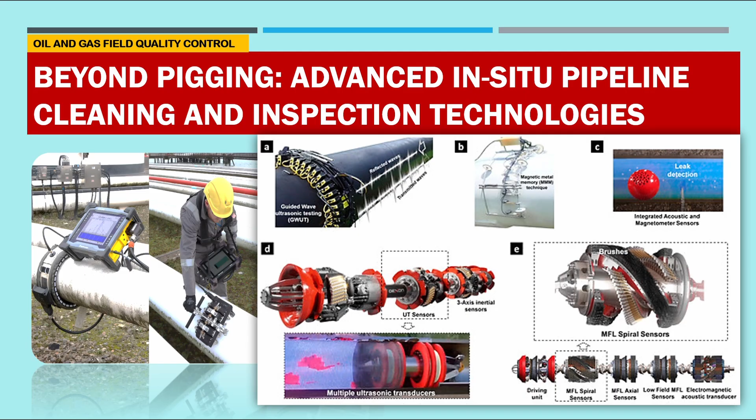The future of traditional pigging, the problem and solution with traditional pigging. Imagine your pipeline silently degrading, unseen threats lurking beneath the surface. Traditional pigging methods might miss critical anomalies, leading to catastrophic failures and costly downtime. But what if there was a way to guarantee pipeline integrity, detect problems before they become disasters, all without disrupting your operations? We are diving into revolutionary technologies that are changing pipeline maintenance forever.

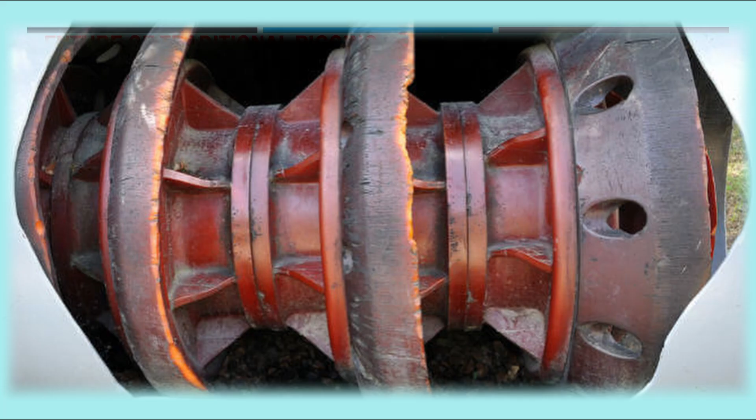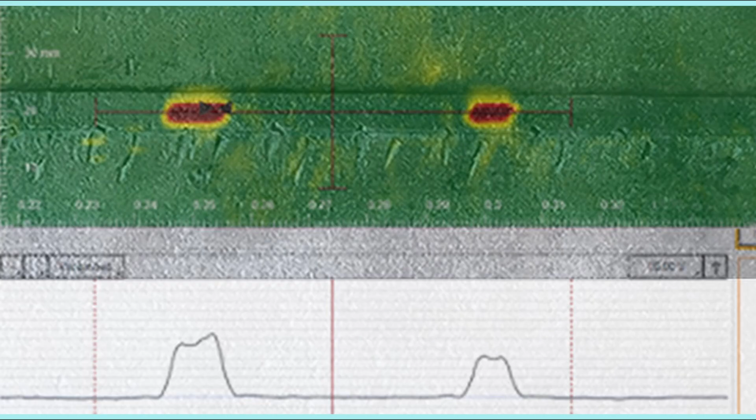Now, curiosity is the mother of invention. Forget everything you thought you knew about keeping pipelines clean. The old pig in a pipe approach is becoming a relic as we embrace a new era of in-situ inspection. What if you could pinpoint tiny cracks and corrosion from miles away, or even clear blockages without ever stopping flow? Now we will discover this type of newest technology.

The future of pipeline management is not just arriving, it is already here. It is far beyond traditional pigging. Picture a world where pipelines self-monitor, identify issues with pinpoint accuracy, and maintain optimal flow 24/7. Let us explore today the cutting-edge innovation in-situ cleaning and inspection. They are not only extending pipeline lifespans but redefining the operational efficiency and safety in 2026 and beyond.

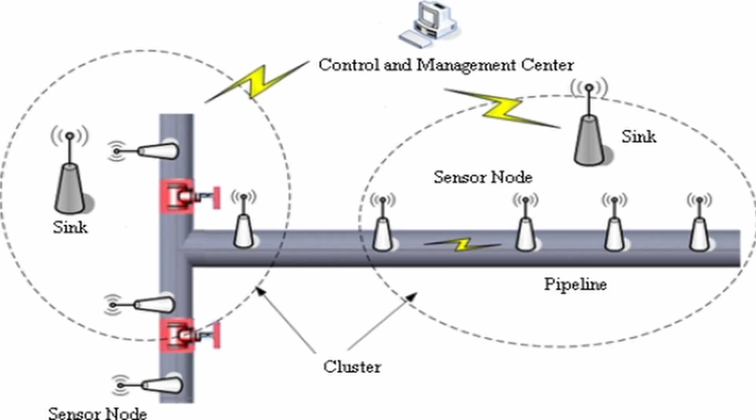The end of traditional pigging. Let us discuss limitations of traditional pigging, why we need to change it. When a technology is running for years, why do we need to change it? Traditional pipeline pigging, which was invented in the early 20th century, involved forcing a cleaning or utility tool or pig through a pipeline using product flow to remove debris, paraffin wax and liquids.

While fundamental to pipeline maintenance, these traditional methods such as foam and mechanical cup pigs face significant limitations in modern and complex pipeline networks, like risk of becoming stuck, inability to navigate tight bends, tees or varying diameters, lack of real-time data. Assembled pigs with cups and seals can also experience product bypass, where fluid flows around the tool, resulting in failure to move forward and inadequate cleaning. The insertion and removal of pig involves handling high pressure media. This is also a safety risk.

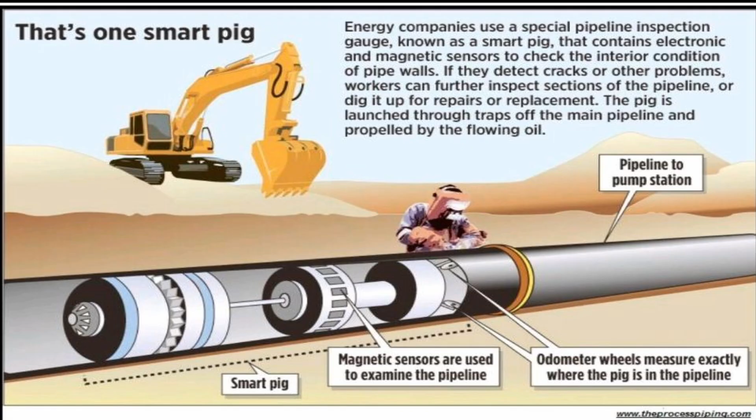Now, gradually we are shifting from traditional pig to smart pig. Initially pipeline pigging was used purely for removing paraffin wax. The technology evolved into smart or intelligent pigs around 1960 to perform inline inspection using magnetic flux leakage, which in short is MFL. Smart pigs are common today. Traditional non-instrumented cleaning pigs, foam, solid cast, mandrel, are of course also necessary in daily operations to prepare lines for intelligent inspection. But smart pigging also, in addition, we need to do now.

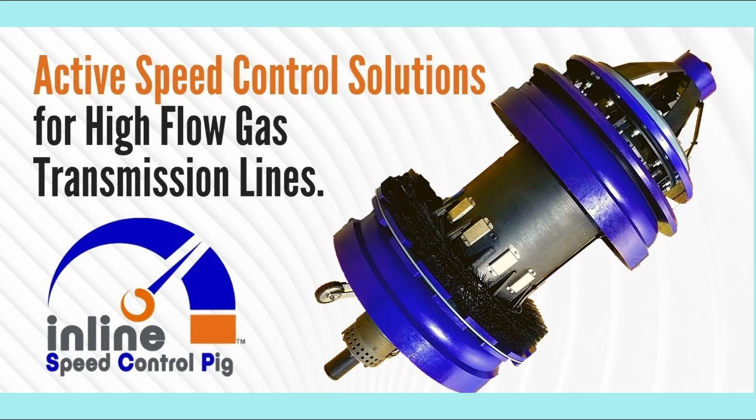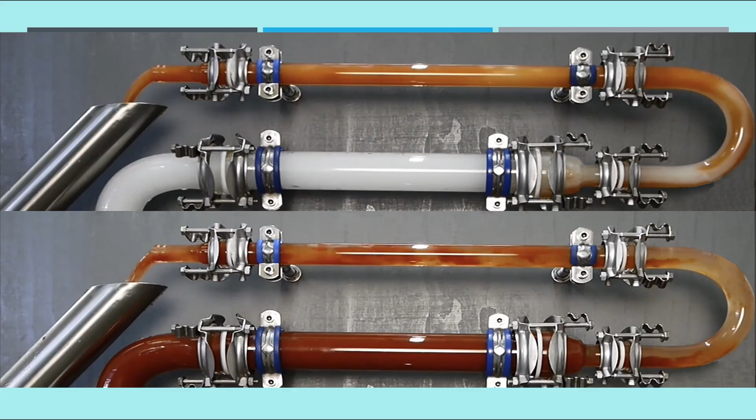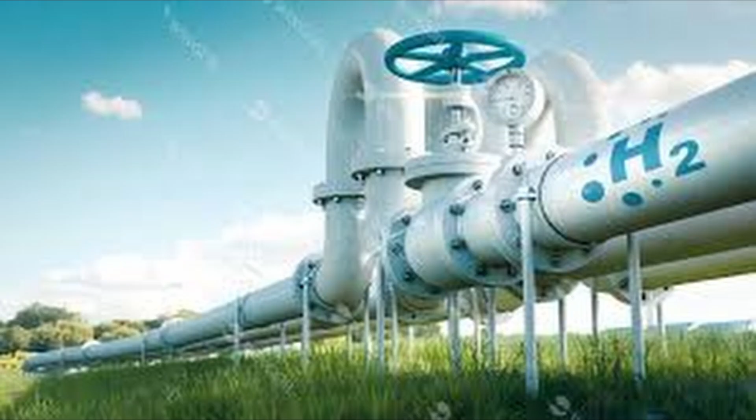To overcome these limitations of traditional pigging, the industry is now adopting speed control pigs, tools designed to maintain a consistent velocity even in high pressure or variable flow environments. Specialized pigs like ice pigging, utilizing non-abrasive semi-solid material that can navigate complex bends and remove more debris than traditional methods. And then bypass pigs, designed with channels to allow fluid to pass through the pig, preventing excessive build-up in front of it, reducing the risk of clogging.

Now, in-situ, or in its original place, represents a major change in industrial maintenance, engineering and environmental management, moving away from traditional, disruptive and costly out-of-service methods. In-situ technologies enable cleaning, monitoring and inspection to occur while equipment is fully operational or in its natural environment. In-situ, also referred to as in-service inspection, converts maintenance to a continuous process without any shutdown.

So what are the benefits of this newest technology? Zero or minimal downtime, which increases production capacity by keeping equipment running. There is no stuck pig anymore with this new technology. Cost efficiency eliminates the transportation, disassembly and reassembly labor. Enhanced safety reduces risk by minimizing the need for manual intervention in hazardous confined spaces. Consistency and quality: automated in-situ processes provide more reproducible and reliable results compared to manual or offline methods.

Now, in-situ cleaning, inspection and repair. So far during maintenance, the total system was required to shut down completely, disassembling it, moving parts to the workshop, cleaning and repairing them and reassembling them. But in-situ changes this to continuous operation, zero disassembly and proactive reliability, as I discussed already. The key areas of application, where do we apply? In-situ cleaning is cleaning in place in the food and pharmaceutical industries to clean the internal surfaces of pipes, tanks, vessels without disassembly, reducing contamination risk and downtime.

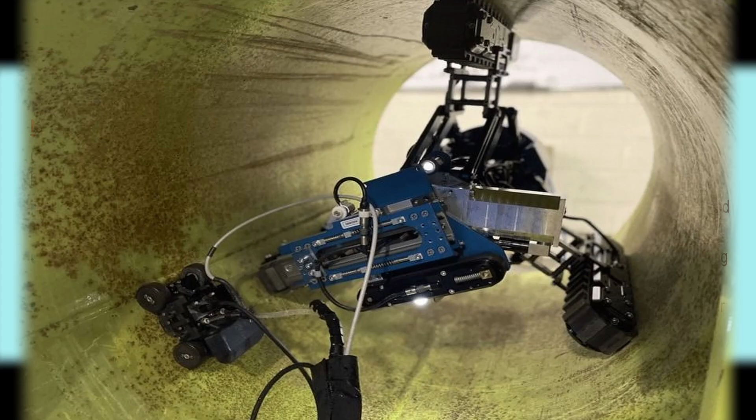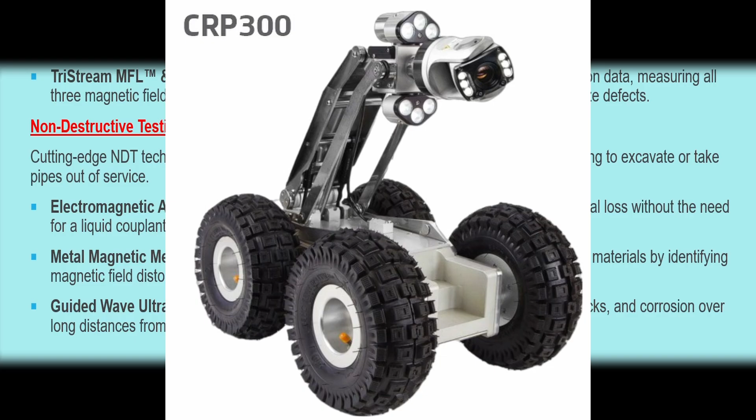Advanced smart robotic crawlers and pigs, which we popularly term ILI. Traditional rigid dumb pigs are being replaced by intelligent pigs, as I told you, and advanced tethered and untethered robots that can navigate complex and previously unpiggable pipelines. These can traverse any part of a pipeline, conducting cleaning and repairing in a single run.

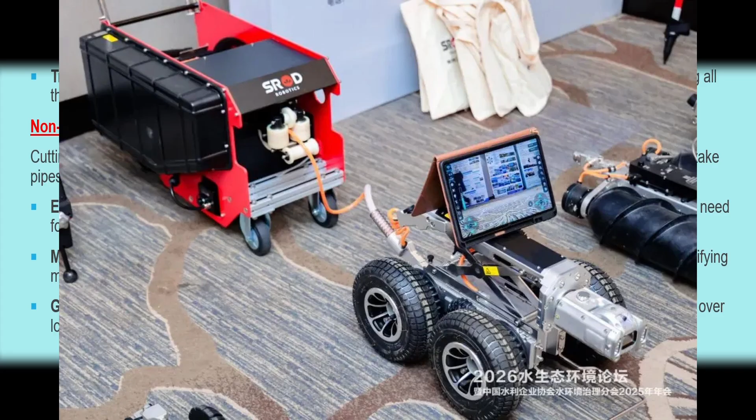Then amphibious and bio-inspired robots designed to move through liquid or semi-wet environments, handling irregular surfaces and tight bends. Then TriStream MFL and ultrasonic tools. These tools provide 360-degree ultra high resolution data measuring all three magnetic field vectors, axial, radial and circumferential, to accurately detect, map and size defects.

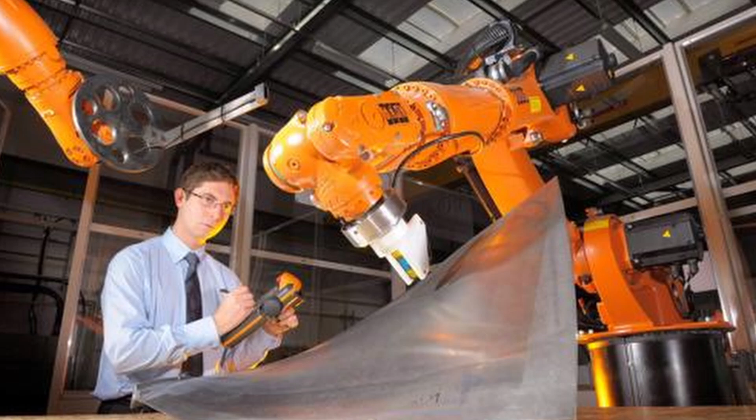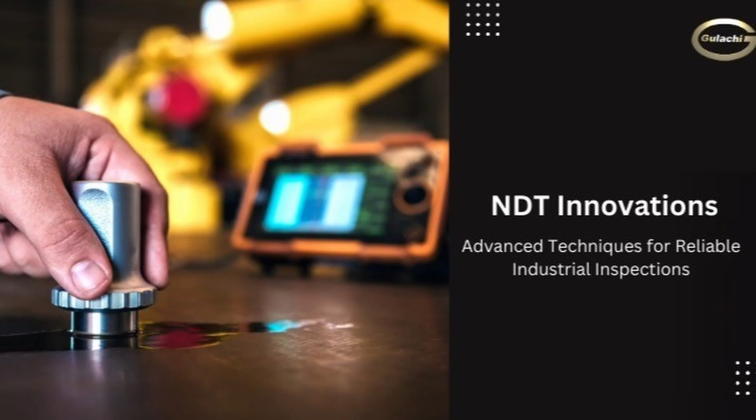Now, non-destructive testing or NDT innovations in the field applying this AI technology and robotics technology. Cutting-edge NDT techniques allow detailed internal and external inspection without needing to excavate or take pipes out of service. Electromagnetic acoustic transducer, EMAT. These tools detect axial cracks and metal loss without the need for a liquid couplant, making them ideal for gas pipelines.

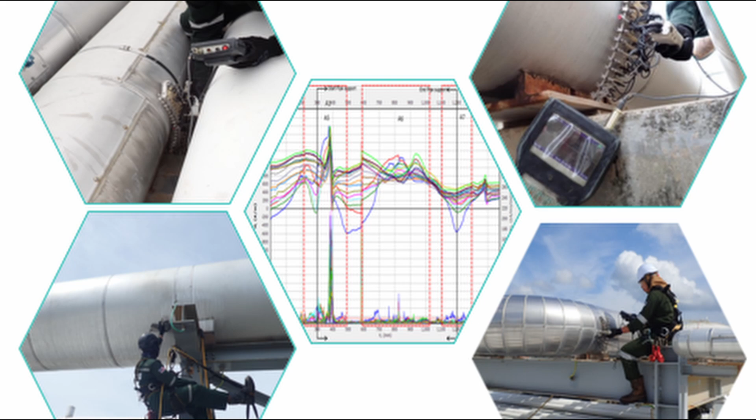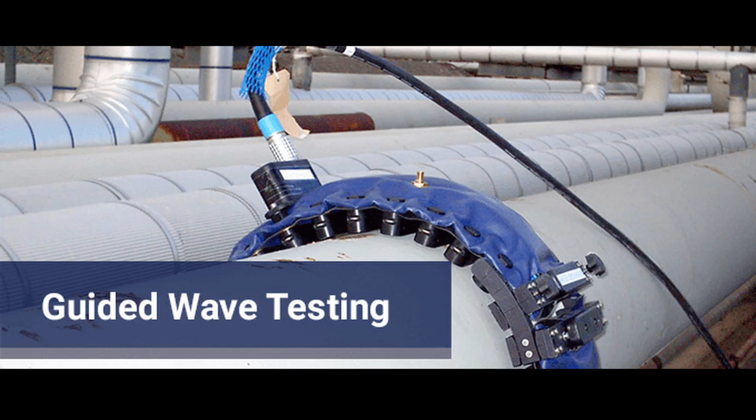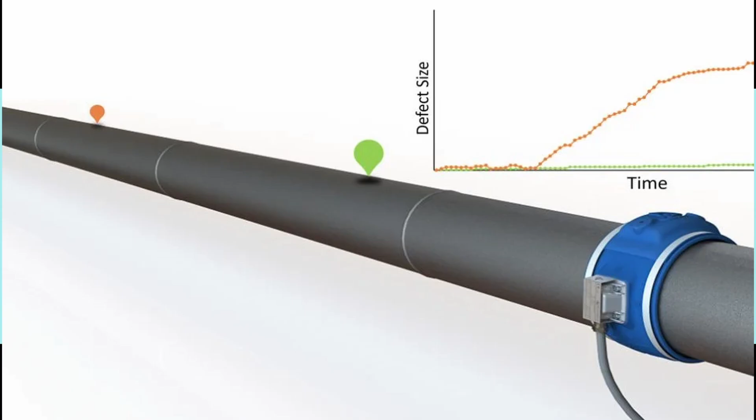Then metal magnetic memory, which is MMM, identifies early stage stress and fatigue in ferromagnetic material by identifying magnetic field distortions, allowing for detection before defects become critical. Then guided wave ultrasonic testing, GWT, uses sound waves to detect wall thinning, cracks and corrosion over long distances from a single access point.

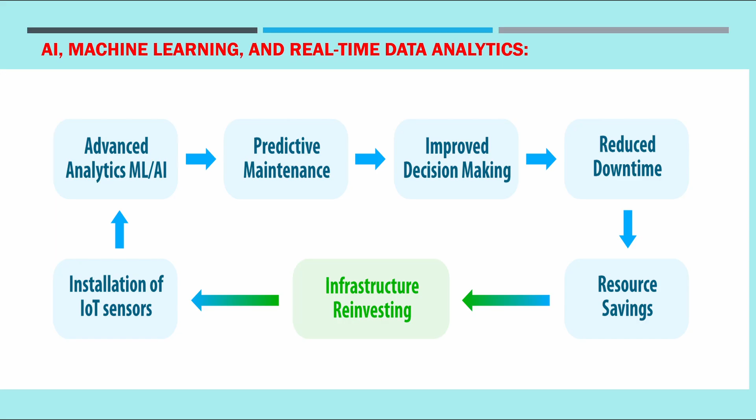Data analytics is turning inspection from a post-operation report into a live, predictive and intelligent system. Predictive maintenance is you predict something and maintain before it happens. Machine learning algorithms analyze historical inspection data to predict where leaks and corrosion will occur, allowing for predictive rather than reactive repairs. AI-powered data interpretation.

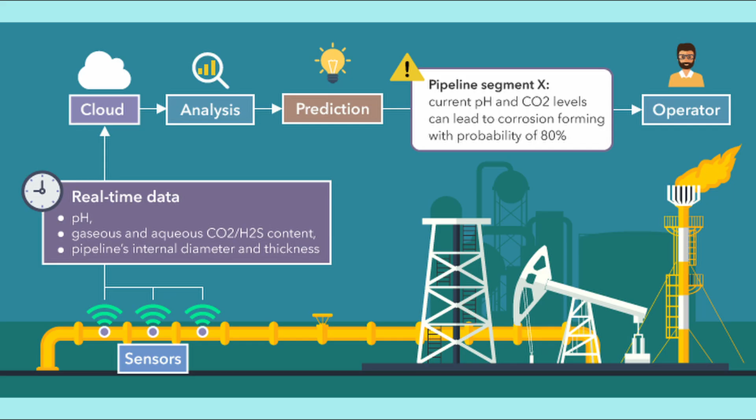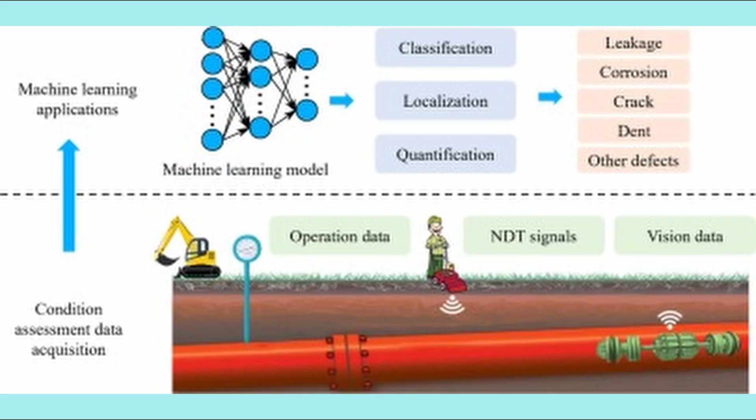AI can analyze vast data sets from inspections, reducing the time needed for manual reviews and improving the accuracy of anomaly detection. Real-time damage assessment. Operators can receive in real-time high-definition images, 360-degree panoramic views, and 3D modeling of the pipeline internal state. So you can visually see the defects in a very practical way, their locations, their orientations, etc.

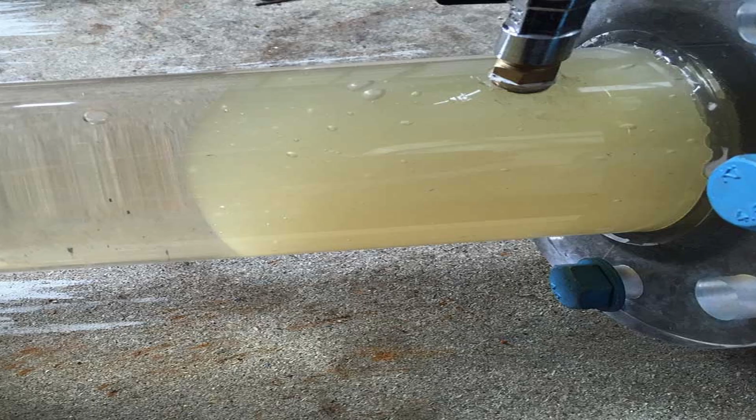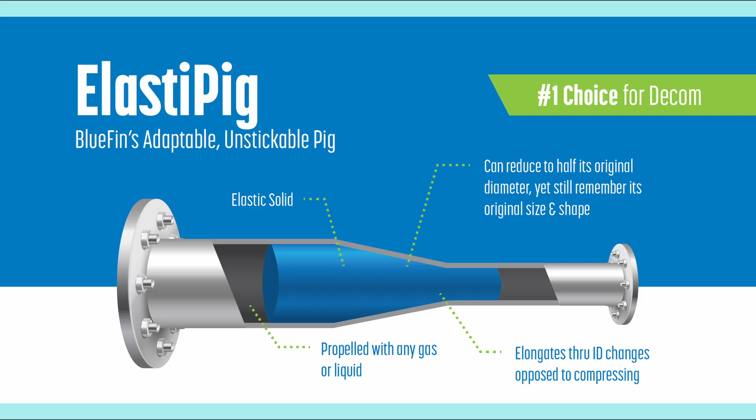Advanced cleaning technologies which are not intrusive. Modern cleaning tools are designed to work in conjunction with inspection tools to ensure accurate data collection without blocking the line. Specialized gel pigs and chemical high velocity pigs are used in pipelines with varying diameter or extremely tight bends to remove debris, acting as a liquid pig that cannot get stuck. Where required, it contracts, and where required, it expands as per the diameter of the pipeline and the bend areas.

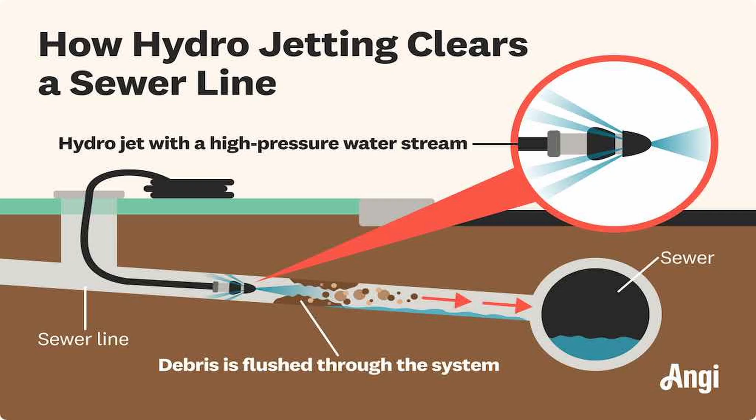High pressure hydrojetting and robotic cutters. These tools are deployed to remove stubborn scale, roots and protruding taps from inside the pipe. Future proofing hydrogen and carbon dioxide pipelines. As the energy landscape shifts, new inspection technologies are being developed for 2026 to handle new materials and contaminants such as hydrogen and carbon dioxide transport pipelines, which require different integrity approaches than traditional oil and gas lines.

Here I put a table for you to summarize our discussions today. You can see traditional versus advanced technology. What is the difference? In the field of inspection, traditional methods are manual, periodic and disruptive, whereas the advanced technologies being implemented in 2026 and beyond are robotic, continuous and in-service. Data quality: before it was low resolution and very basic data. Nowadays you can get high resolution 3D mapping and AI processed data.

Unpiggable lines require excavation in the traditional method, but advanced technology has specialized and flexible robots. I told you about gel pigs which can change their diameter based on the requirement. And cleaning: the traditional method was simple scraping, with risk of blockage. The pig can get stuck, and in advanced technology, chemical or gel pigs and robotic cutters are there to remove the blockage. Maintenance: reactive, after failure, before. Nowadays it is predictive, we can do it before failure.

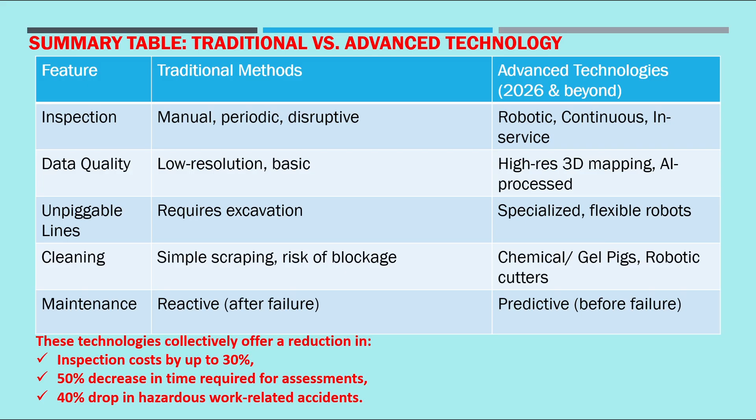So these technologies collectively offer a 30% reduction in inspection cost, a 50% decrease in time required for assessment and a 40% drop in hazardous work related accidents. This video was not directly about any subject. This is a kind of future innovations. Hope you guys gain some knowledge from it.